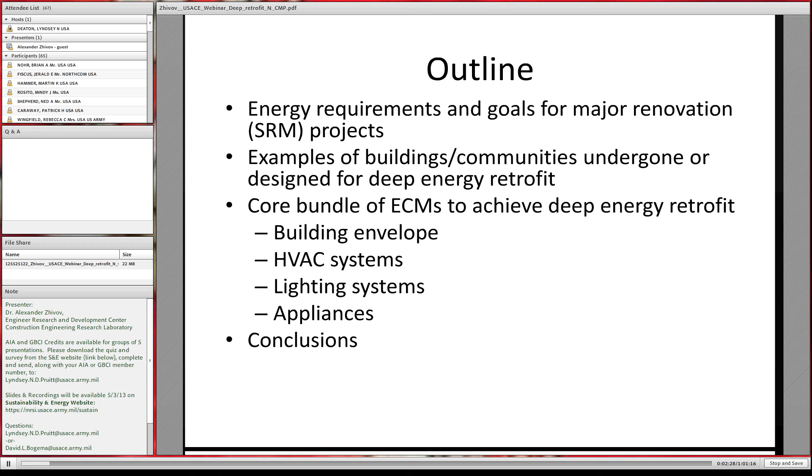So today I will cover the following topics. I will talk about the energy requirements and goals for major renovation SRM projects. I'll show you some examples of building communities undergone or designed for deep energy retrofit. We'll talk about the core bundle of energy conservation measures to achieve deep energy retrofit. We'll address building envelope, HVAC systems, lighting systems, appliances, and then I will come to conclusions.

So probably you already saw this slide a few times, so I just want to recap it. We have building site energy use reduction requirements, which are outlined in Energy Policy Act 2005. We have ECB 2010-14 for the site energy use reduction, which soon will be replaced by a different one, and I believe it will be referencing not ASHRAE Standard 90.1 2007, but a later version from 2010. We have a fossil fuel reduction requirement stated in EISA 2007. Army policy to achieve 8 net zero energy installations by 2020, 25 by 2030, and we also have an Army requirement to adopt ASHRAE Standard 189.1.

So now, just to deconfuse you with all these requirements, I'll just show you which ones are more or less stringent. So actually here in this table, you have energy use intensity targets in kBtu per square foot per year. And as you can see on the site energy, the most stringent is the Corps ECB 2010-14, which is 40% better than the ASHRAE Standard 90.1 2007.

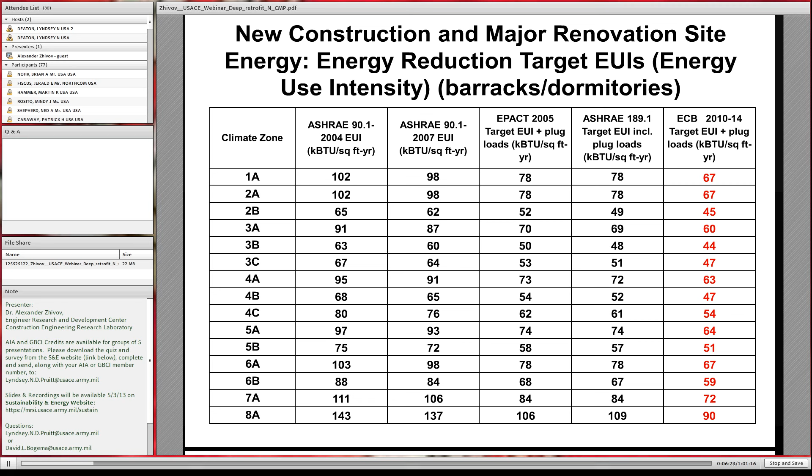Okay, so this one I think we'll go on, yeah. So I will go briefly over these last two slides.

So this slide shows you the EISA requirements based on the fossil fuels. So the table shows the CBECS numbers in kBTU per square foot a year, and then in order to get your target for 2010, you'll need to multiply it by 0.45, and starting at 2015, you'll need to multiply it by 0.35. So it will be only 35% left from this number.

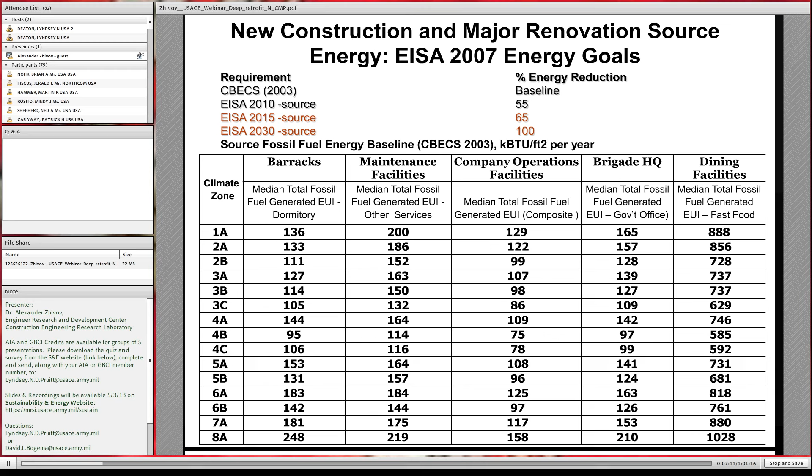So the next slide shows the table with proposed ASHRAE Standard 100 energy targets for existing buildings. This standard later this year will replace the existing energy efficiency standard for existing buildings that was issued in 2006, and it will cover about 53 types of buildings.

However, Army buildings are not covered well in this table, so we'll have to adopt some categories as we see fit. For example, Army dining facilities will have a better representation by fast food restaurants here. And barracks will be like dormitories, and let's say maintenance facilities will be like other services. But in any case, that will help us at least get an understanding of how to meet our goals with energy, if we decide to adopt ASHRAE Standard 100 for the Army.

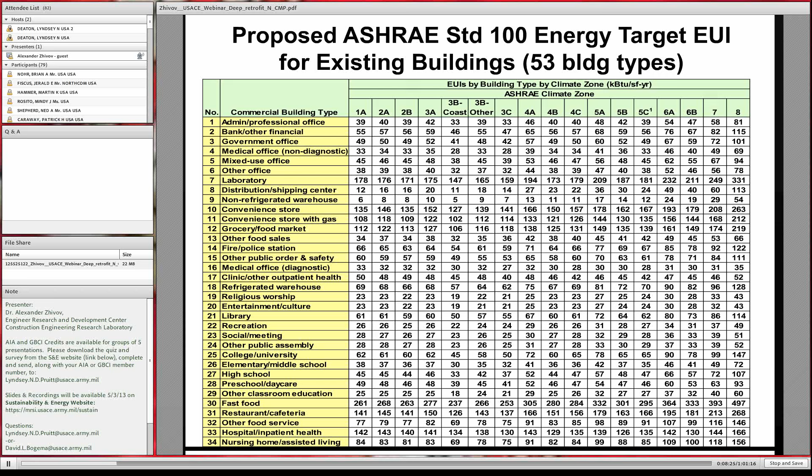This one is the most stringent requirement among all others. We started thinking that it will be easy to reduce the energy use by 3% a year. So during the first few years, we were lucky to get below the curve and to get more energy reduction than is required by law. And we're talking about section 431 of the EISA 2007 requirement. However, during the last few years, we are not meeting this requirement.

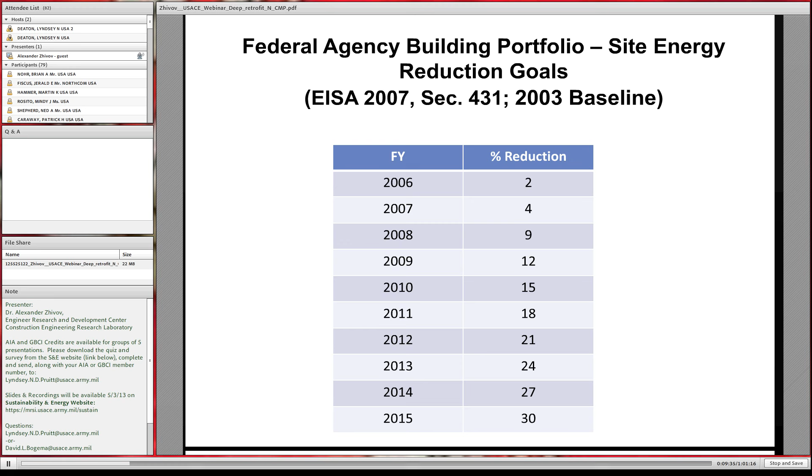And the reason is very simple. If you take our requirement for 2015, it means that we need to reduce our energy consumption in the whole Army portfolio by 30%. So we don't have money to touch 30% of buildings, but if we had, it means that every single building needs to be renovated to a net zero energy building, which is not feasible. So this is a very stringent requirement, and we need to find a way to deal with it.

So having said that, we need to state our definition of the deep energy retrofit so that we can spell out our requirements to our contractors with our new renovation projects. So EISA 2007 and net zero energy installation energy goals cannot be achieved when new and major renovation projects are designed and executed based on minimum requirements, even including ASHRAE Std 189. These goals have a chance to be met with all funded projects designed and executed to achieve deep energy use reduction.

So deep energy retrofit may have different definitions. In Europe, for example, the member states define it as nearly zero energy buildings, which for me doesn't make a lot of sense. It's not very specific. Some countries like Germany or Austria define it as a passive house level to which buildings need to be renovated.

So given some experience with deep energy retrofits both in the United States and abroad, my personal proposed definition for deep energy retrofit at Army is at least 50% site metered total energy use reduction, meeting proposed ASHRAE Std 100 EUIs, EISA 2007 requirements for 2015, and at least 40% better than ASHRAE Std 90.1 2007. So these are a combination of requirements that are not competing but adding to each other.

So let's look at what kind of examples we have from the US and from overseas. We have a great database developed by New Buildings Institute, and it was a project funded by the Northwest Energy Efficiency Alliance. It has more than 50 buildings that were retrofitted using the deep energy retrofit concept. As you can see, some buildings were 79% better against the baseline, others were 68 or 46.

So there are about 50 buildings in this database, and actually it's a great success story, and we'll be working with this organization to learn in more detail the way they got to these energy savings.

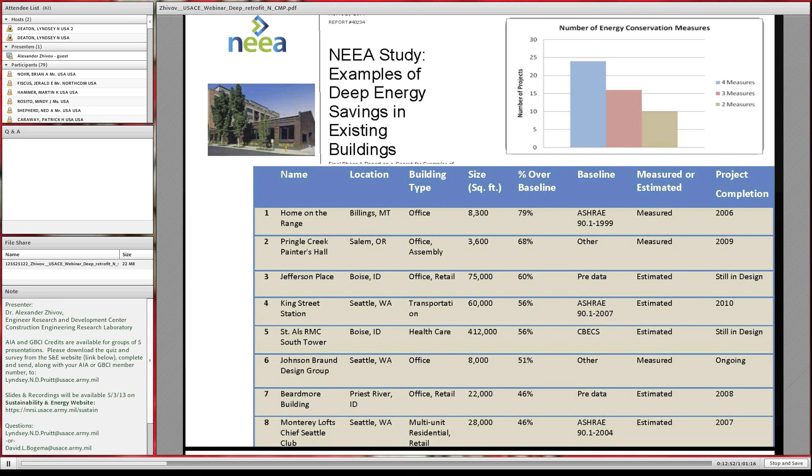Example from our Army renovation project. In about 2008, IMCOM wanted to renovate buildings at Fort Polk, not because of energy issues, but because of a mold problem that we had. So having no energy deep retrofit in mind, we worked together with the Fort Worth district, and by the end of the day, we had a building that was about 50% more energy efficient compared to the other similar buildings next to it, both on electrical and thermal energy use reduction, and it had an air tightness of 0.1 CFM per square foot at 75 Pascal.

It had great comfort, relative humidity below 50% all year long, increased living area and no mold problems so far. So the same concept was adopted to another 30+ barracks at Fort Polk, and the same design is currently used at Fort Hood.

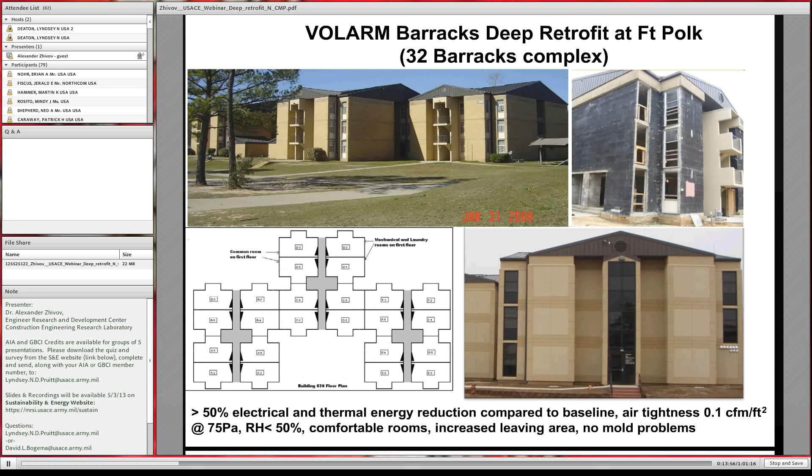Example from Germany. They looked at an area with about 200+ buildings for low-income families. So these buildings are pretty much similar to what we have with our barracks. And they were able to drop the energy consumption about tenfold compared to the baseline, not only with the site energy, but also with the source energy. The way they did it was from energy conservation measures like insulation, windows, air tightness, heat recovery, and such. Plus, they connected these buildings to a biomass-based central energy plant with cogeneration.

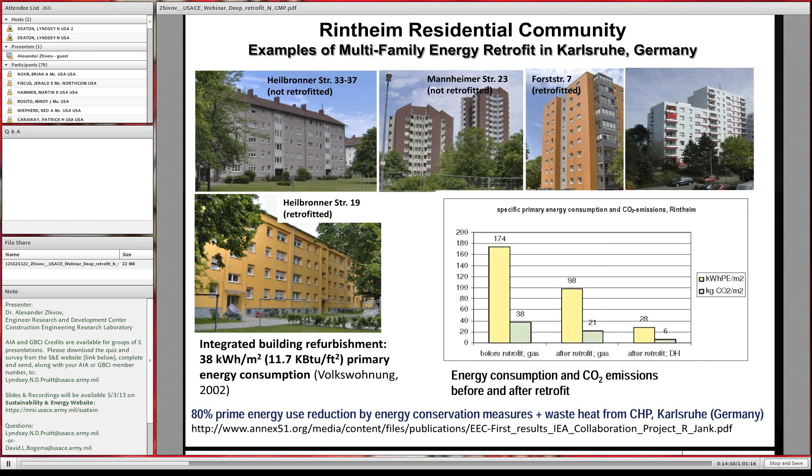Another example is the former U.S. Army garrison in Bad Aibling. It's an interesting story where they wanted to demonstrate what's available technology-wise in Germany. So a private company bought it from the government, and in a matter of 4 years, they moved from the baseline to plus energy. They are generating more energy than they are consuming.

And these are some pictures. Some buildings were demolished, some buildings were renovated, some buildings were built in the passive house style. They put a huge PV field. They used some solar water heating on the roofs and a biomass central energy plant.

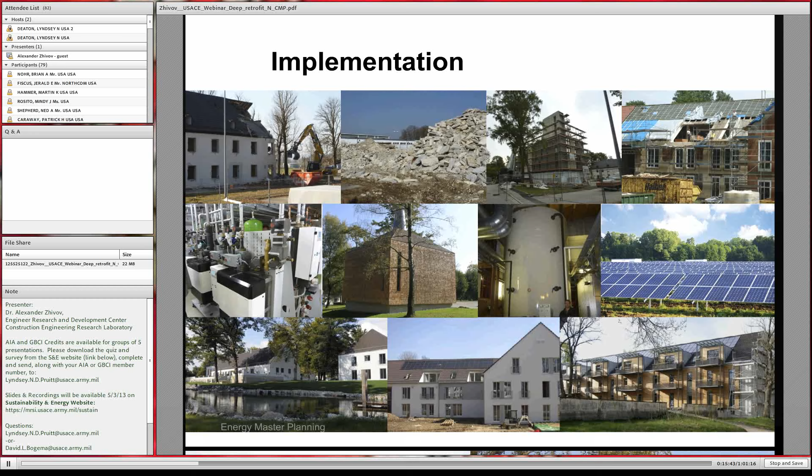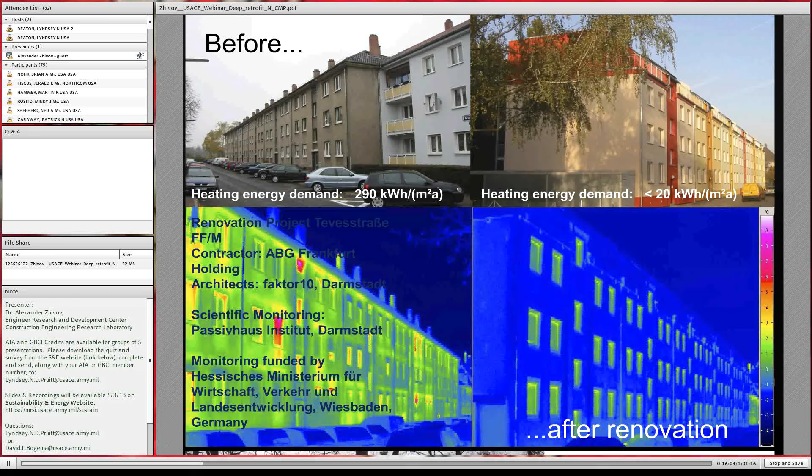Another example of deep renovation of a residential area in the Frankfurt area, where they were able to go from 290 kilowatt hours per square meter a year to less than 20. Again, this is a private sector project, and it is definitely cost effective. There are no subsidies in this project. Another army garrison in Germany, Paul Revere Village in Karlsruhe, where they did something similar with army barracks and other buildings to get a low energy community.

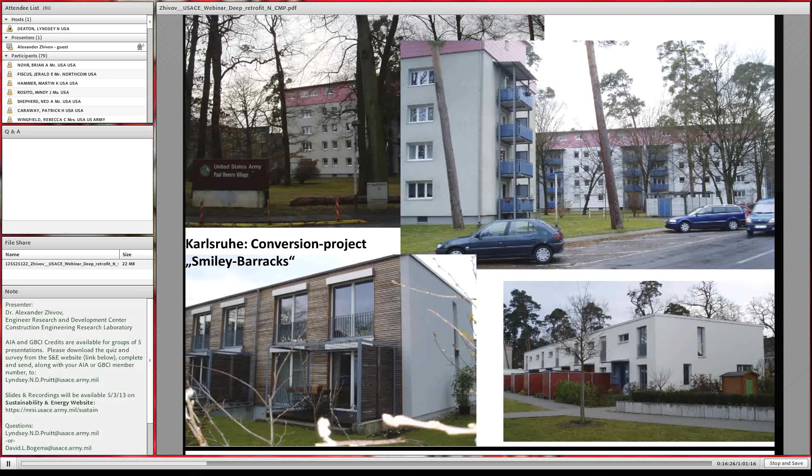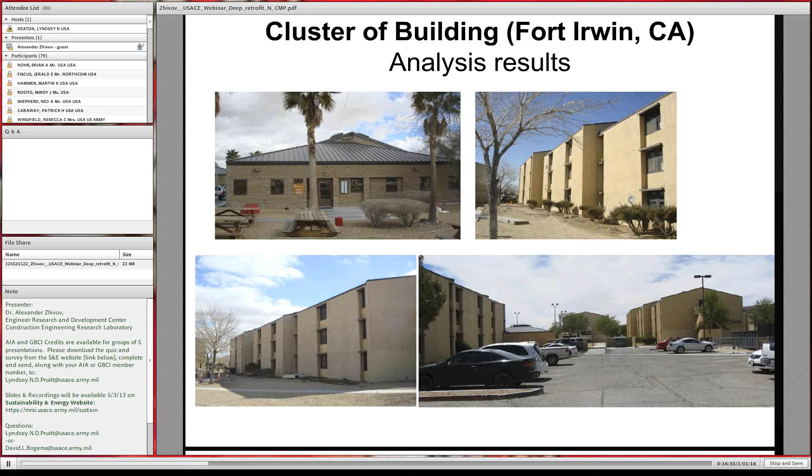We did a paper exercise for Fort Irwin, looking at a cluster of buildings with four barracks, one dining facility, and a central energy plant. We did something the same with all buildings: improved insulation, triple pane low-E windows, greater building air tightness, high efficiency lighting, advanced control system, Energy Star appliances, and we tried different types of HVAC system for each barrack. In all cases, we're using the dedicated outdoor air system, but with different ways of heating and cooling the building.

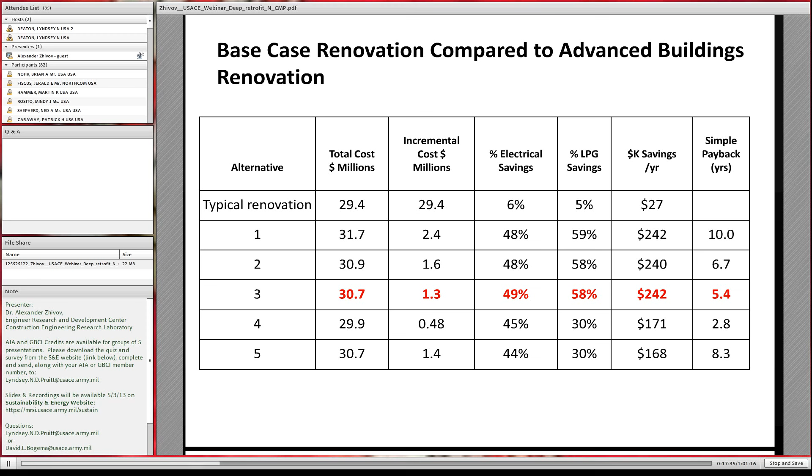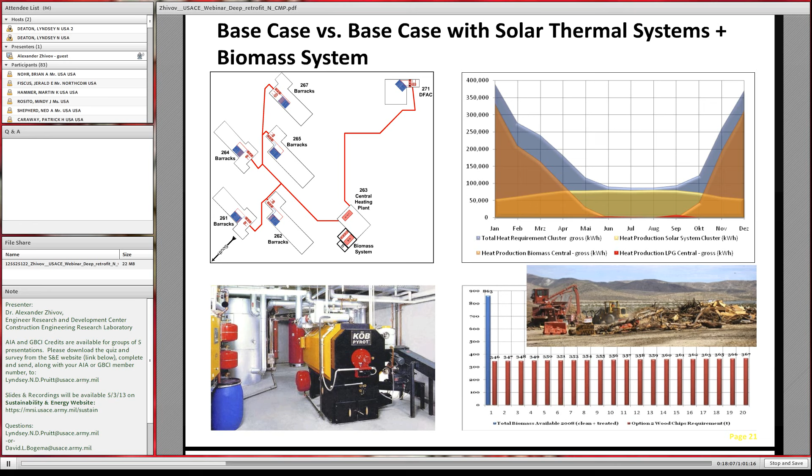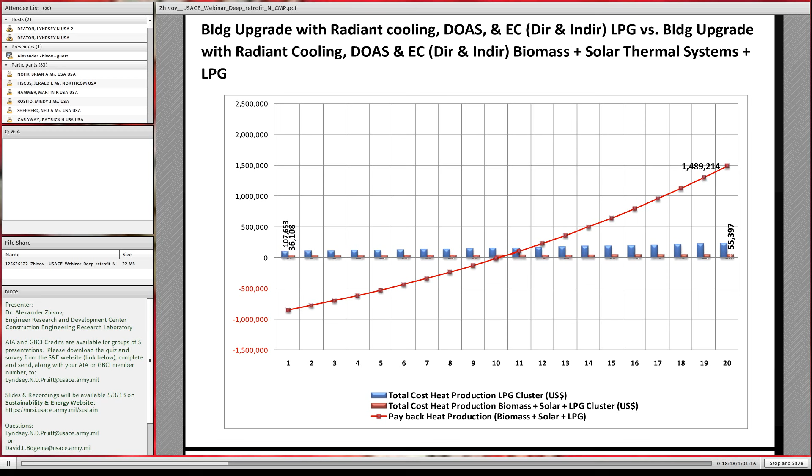Now, if you go further and you look at the central energy plant and replace LPG with biomass, and interestingly enough, we have enough biomass in the Mojave Desert. It used to be a Mojave forest. So instead of paying for removing this forest, they can use it as biomass for the boiler plant, in addition to the solar water heating. So with that concept, the overall energy saving will be net zero thermal and 50% electrical reduction, with a total payback of about 10 years.

Now let's look at what kind of books and materials are available to do something like that internationally. On the left-hand side, there is a great book that I picked up in France. It talks about different architects of buildings built in France between the middle of the 19th century up to the middle of last century, and the ways they renovate the building envelope with all the architectural details for each architect. It's about 300 pages. If you look at the graphics, you don't need to speak or read French. It's readily available on the internet.

On the right side, you see some materials from our project that we are working on with DESA on the installation design guides for net zero energy installations. We developed masonry retrofit guidelines for a couple of installations already, West Point and Fort Bliss, and we are working with the other installations to develop something similar for them.

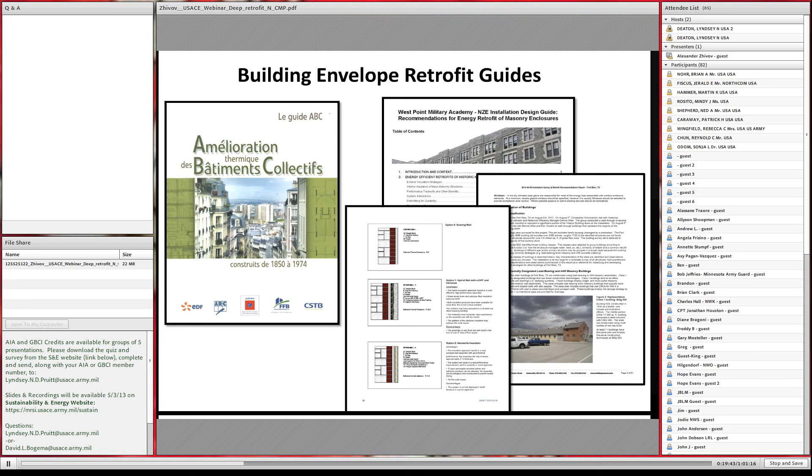A few other interesting handbooks and guides for building energy retrofits: the Handbook of Sustainable Refurbishment. It has interesting details on how you deal with both energy and sustainability in renovation projects, as well as a couple of guides which are already finished by PNNL, who worked on the project with the Building Technologies Office of DOE for K-12 schools and grocery stores.

Another good source of information will be the Passive House standard for retrofit. It has a book in English and German from the German Passive House Institute, and there is a different document for passive house renovation from Austria. It has interesting architectural details for both thermal barrier, air barrier, and such, and can be applied to different types of architectural buildings in the Army.

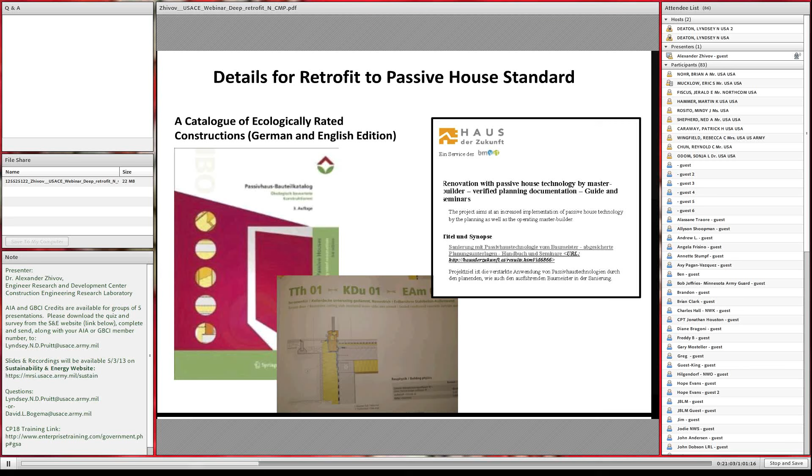So now let's go over energy conservation measures to be considered in deep retrofit. And I will start with the most important parts. It's improved building envelope insulation: walls, roof, attic, basement ceiling, better windows, a reduction of thermal bridges, and cool roofs where they're applicable. Also insulated doors, vestibules to the high traffic entrances.

Reduced air infiltration, efficient lighting, daylighting strategies, dedicated outdoor air systems for ventilation, pressure and humidity control, low exergy HVAC systems such as radiant heating and cooling, indirect air pre-cooling, ground coupled heat pumps and such. An important part is the reduced plug loads and using efficient appliances.

And it needs to be considered based on the energy cost and also whether you want to become net zero energy and pay for renewable energy sources, or you have low energy prices. So we'll talk a little bit about that later. Reduced energy waste through combined heat and power.

And so once deep energy reductions are achieved, renewable power sources become more affordable, for example, biomass or central solar water heating systems. So the key to cost effectiveness of the deep energy retrofit is using bundles of energy conservation measures. We are not talking about analyzing each energy conservation measure separately, because in this case you will never get to building envelope.

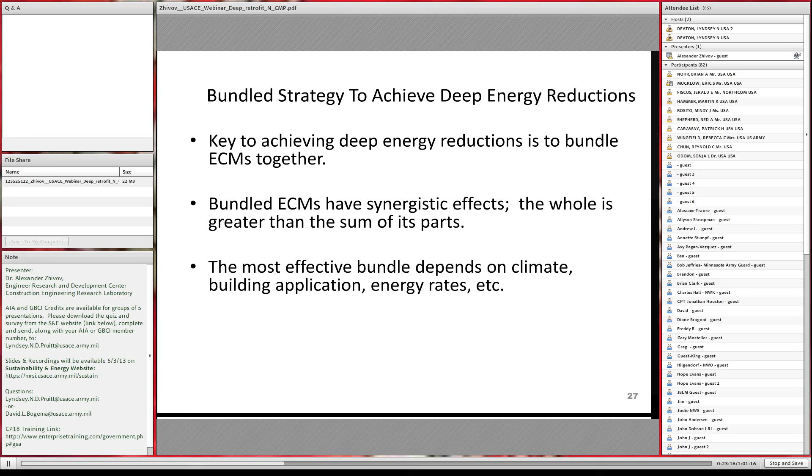Bundles have a synergetic effect, and in this case, if you're paying more for the building envelope, you can reduce or eliminate the need for some mechanical systems. For example, in some climates, let's say climate zone 5 and up, you don't need air conditioning. And of course, these effective bundles depend upon climate, building application, energy rates and such. So let's talk a little bit about each of these categories.

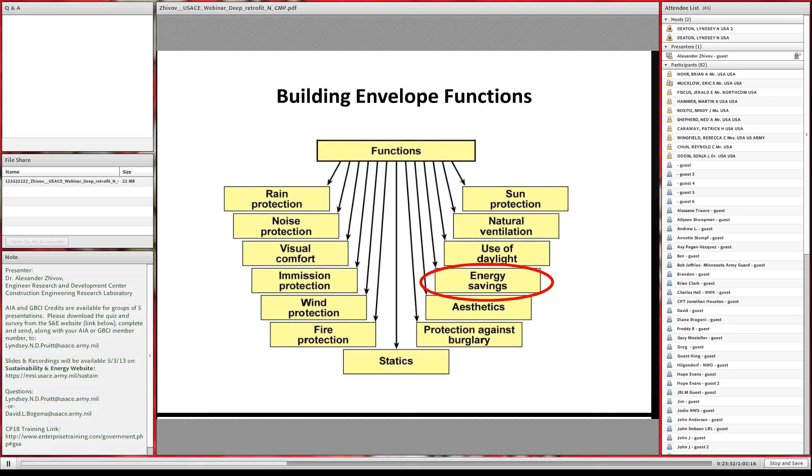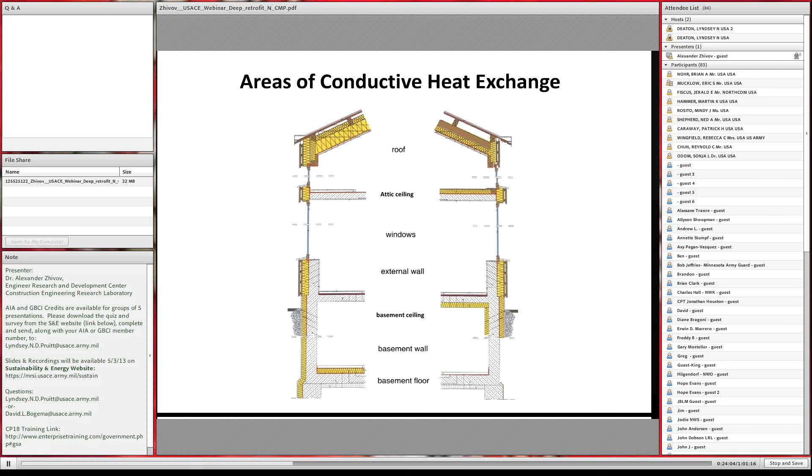This slide shows you building envelope functions, and one very important part is energy saving. So the heat exchange between the building and the outside occurs through conduction, radiation, and convection. And this is a schematic of the building envelope with the different approaches to its improvement. You can see different elements that you need to pay attention to, which include roof, attic, windows, external walls, basement ceiling, basement walls, basement floors. Something you can do with a renovation, something you can't do.

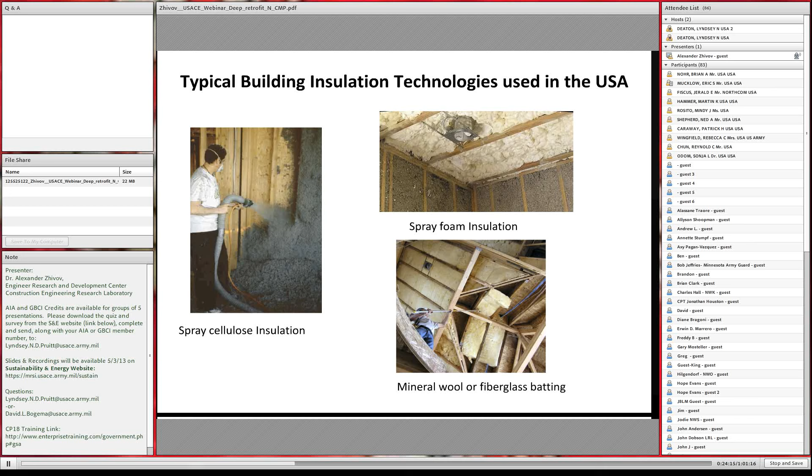So typical building insulation technologies used in the United States include spray cellulose insulation, spray foam insulation, and mineral wool or fiberglass batting. If you want to go to more advanced technologies which are also available in this country, you can look at technologies with a high R value. You can start with vacuum insulation panels. Since a few years ago, these panels are available in the United States. You can look at super insulating light transmitting systems, which are also available in the United States, and others down to mineral wool batting of R4.

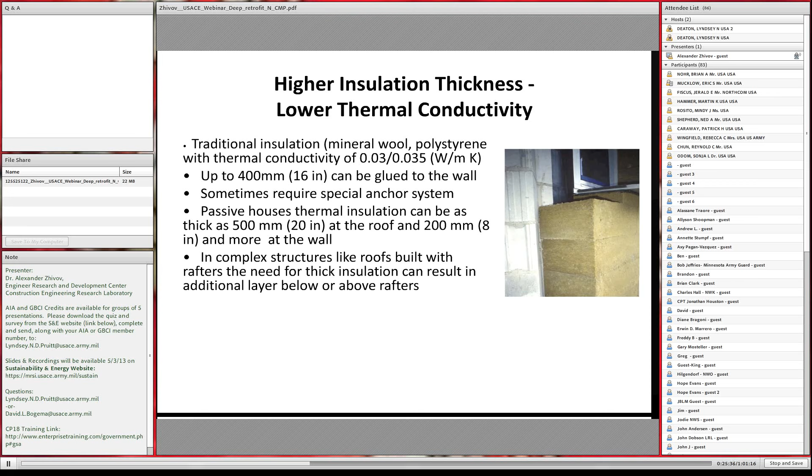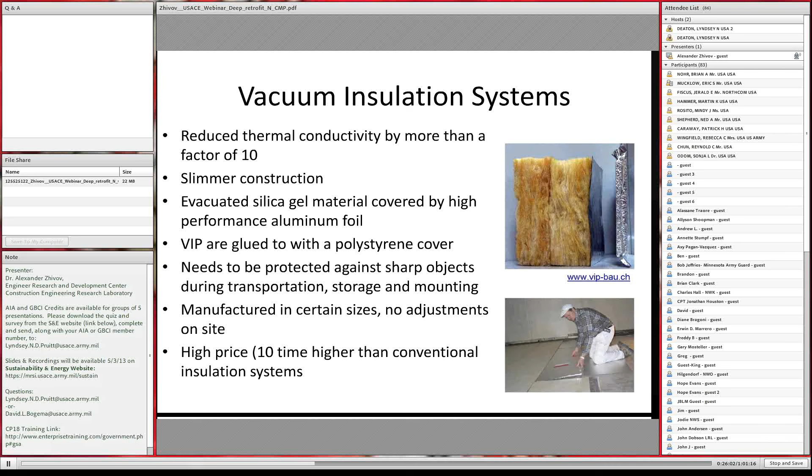Vacuum insulation systems are 10 times more expensive, but they are 10 times more efficient. So actually, if you are looking into the internal insulation of, let's say, historic buildings, you might want to consider vacuum insulation so that you can save space for the mission rather than put heavy insulation on the inside of the building.

In the guidelines that we are developing for net zero energy installations, you can find some components of the wall constructions for different classes of buildings, with a description of how you put these layers and how much insulation you need to put and where to put your thermal barrier, air barrier, and vapor barrier in the whole package.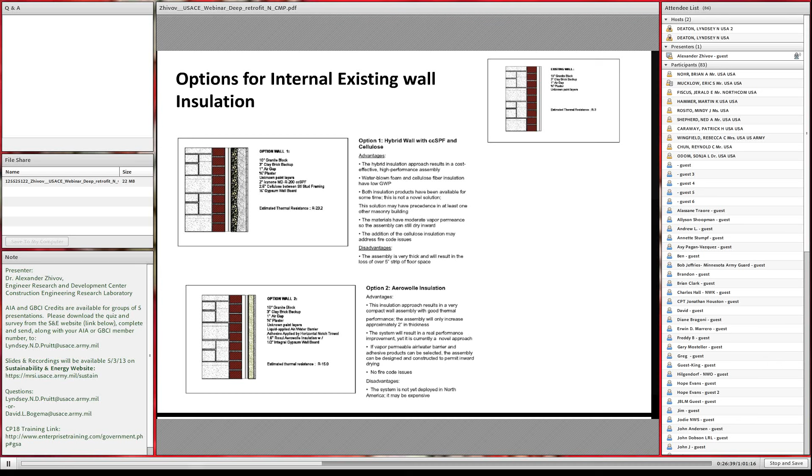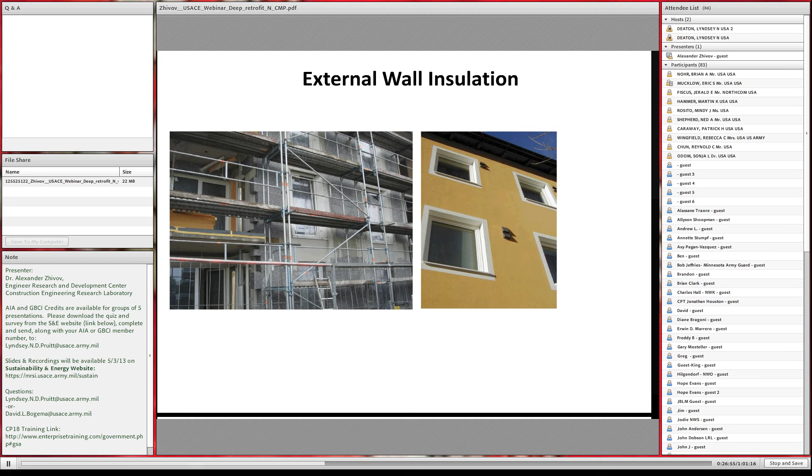This is an example of external wall insulation with an insulation level of R30, and here on the right you see how the wall looks after the renovation. You can see some technologies used for external wall insulation. You can use adhesives or fastening, and actually the problem with the fastening is that here in the United States we have only 6-inch fastening for insulation, while in Europe you can easily find 12, 16-inch fastening, and both here and in Europe, they are manufactured in China.

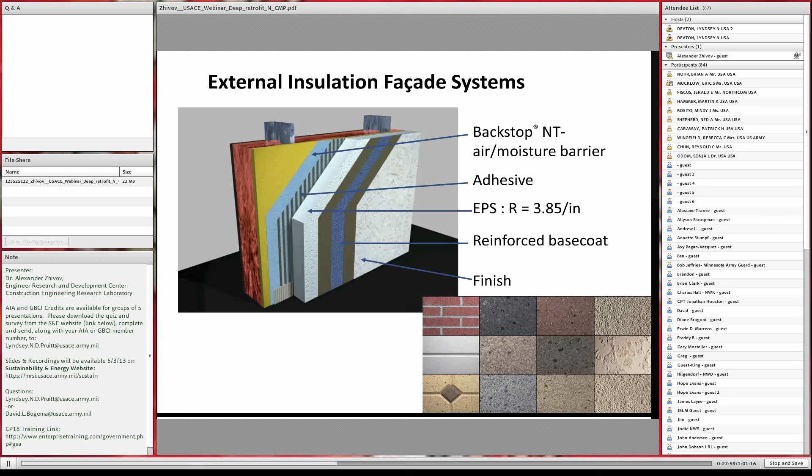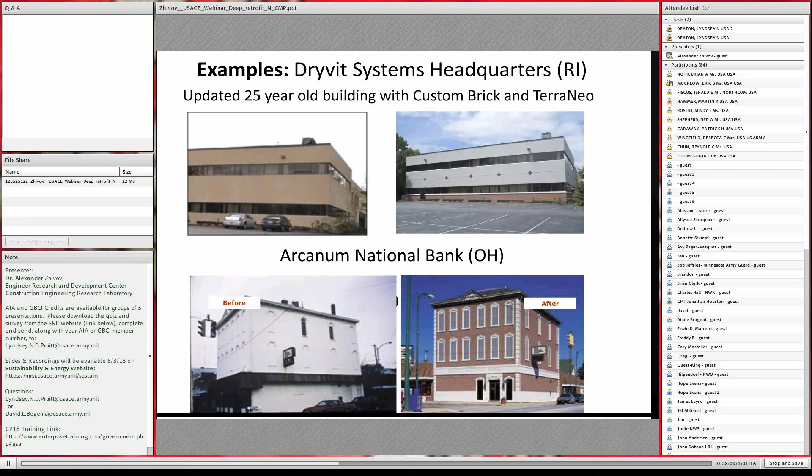Another type of external insulation would be the EIFS, and sometimes installations are not very interested in EIFS because they like brickwork, and in many cases a plain vanilla type of facade doesn't look attractive. Today you can find brick type of EIFS in many applications, and here are some examples of brick type of EIFS installed by a Dryvit company.

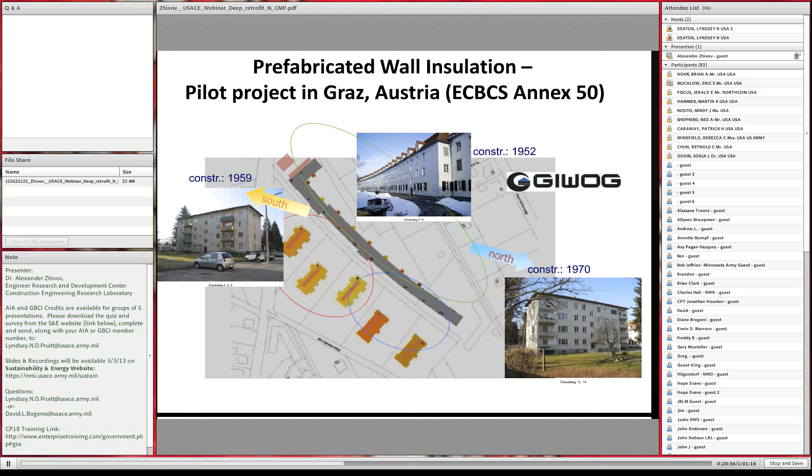There are some examples. One interesting and cost-effective way of insulation of existing buildings is prefabricated wall insulation. I just want to share with you a few slides from a European project which is a part of the International Energy Agency Annex 50 on prefabricated insulation for existing buildings. Here are some examples with residential buildings.

The concept consists of on-site installation and prefabricated modules that are done in plants like we have with manufactured homes. The quality of these products is much higher than when you have it installed on-site, and you can do a lot of things with that, incorporating your utilities in the insulation. You can put pipes and ducts and different communications within those prefabricated modules as well as windows.

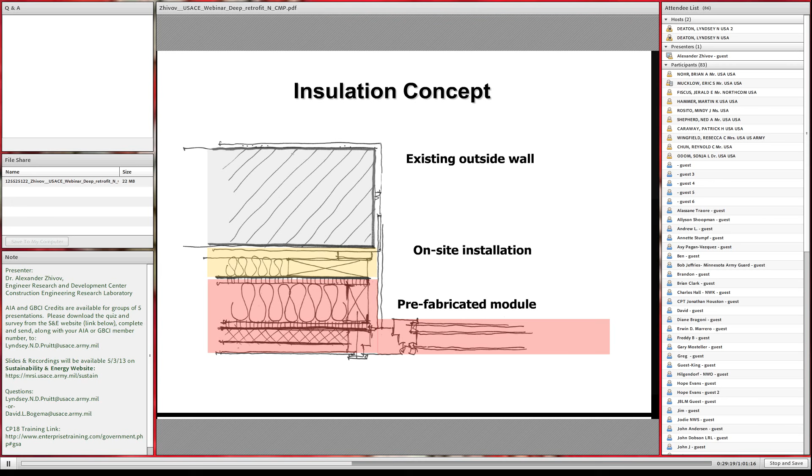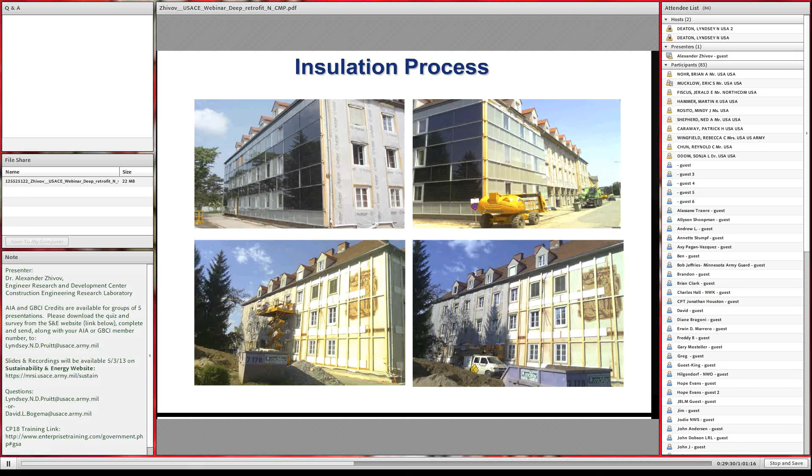So these are some examples of the installation process. We've seen the existing wall with some on-site frame that they're putting, getting the building ready for panels, and here come the panels. And the panels can have different types of insulation materials, but that's how they look and how they're installed.

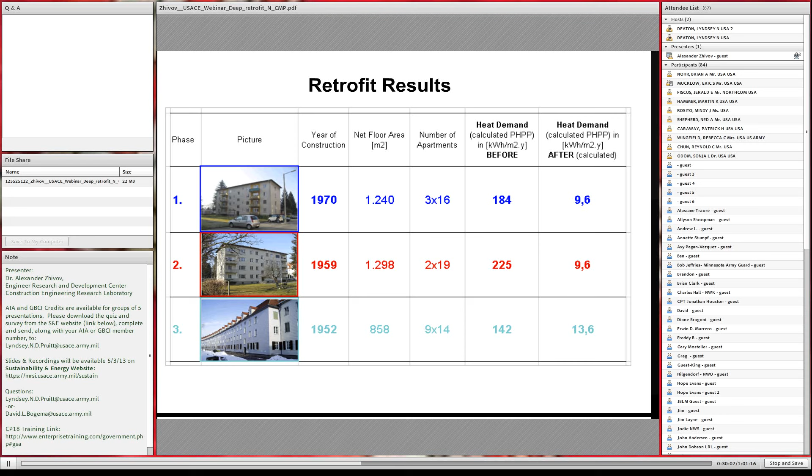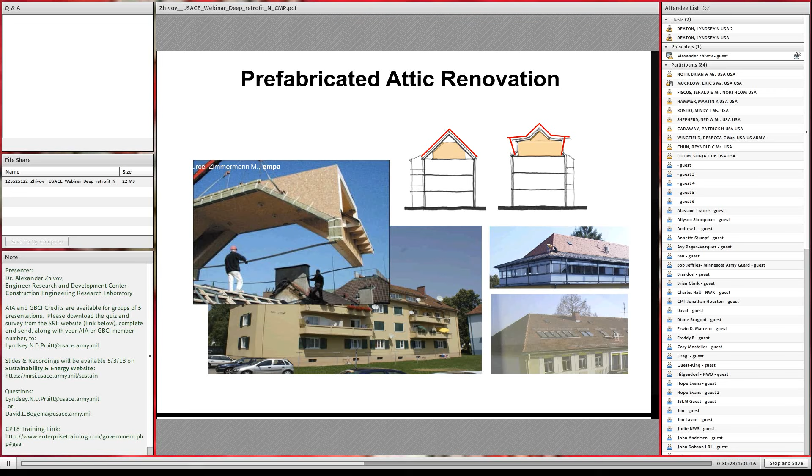And the overall effect is, again, energy conservation 10 times compared to the original baseline. And it has reduced cost because it's much cheaper to do it in the factory than on site. You can do it both with a facade and with the attic. So let me go back. So you can see an already prefabricated attic that is installed in a matter of hours on top of the building undergoing renovation.

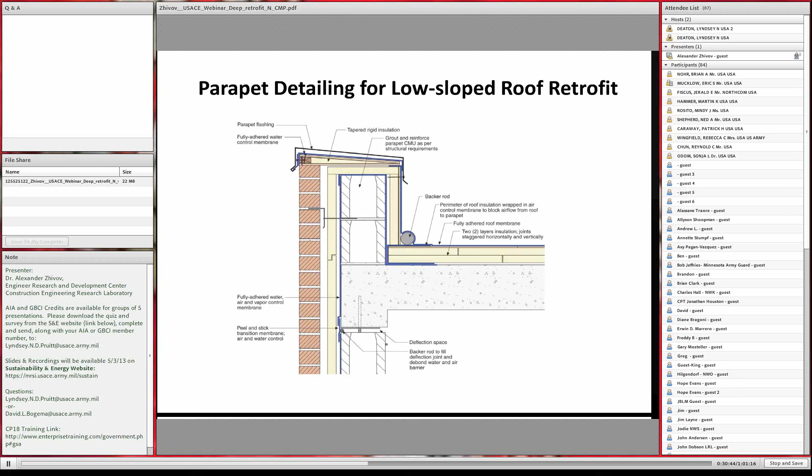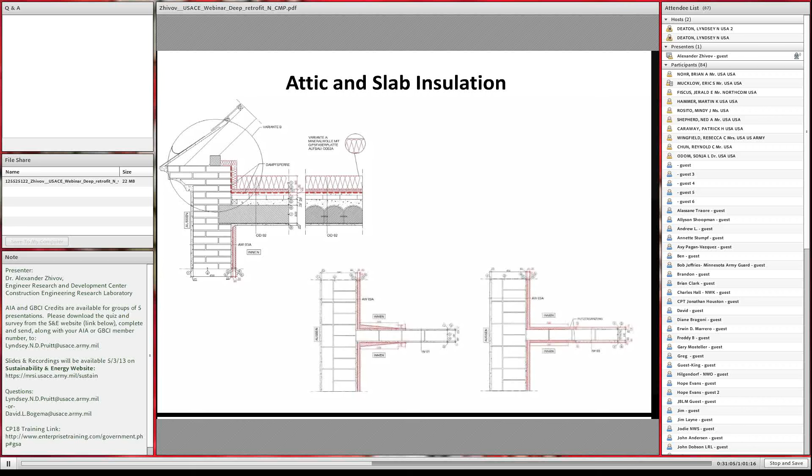Some details for a continuous thermal barrier for the wall to roof intersection. These are details again from the guide that we are producing together with Building Science Corporation. Some other ways to insulate attic and slabs. Actually, if you can't insulate the building from outside, the way to reduce thermal bridging with the slabs is to put about a couple of feet of insulation on the slab, preferably from both sides, if not at least on one side.

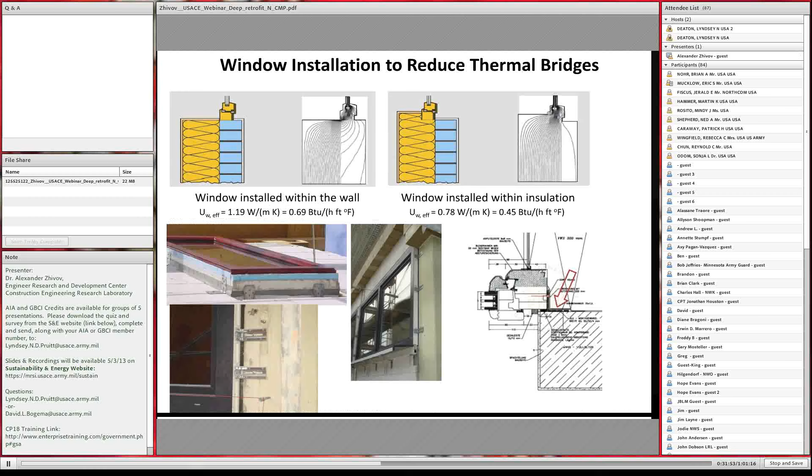Thermal bridges for the balconies and slabs. Again, you cut a thermal bridge and you attach the balcony to the building without penetrating through the insulation. Windows create significant thermal bridges. So when you install your windows, you want to install them not within the wall, but within the insulation layer, and you have certain metal profiles to attach the window to the wall, and then you put your insulation around the window. It allows you to reduce thermal bridging by at least 50%.

So I think that we don't need to spend a lot of time discussing air tightness. So we have ECB, the first one was issued in 2009, another one May the 1st last year. We went through different versions of the air tightness protocol. The last one was developed together with a team from the Air Barrier Association. The requirement is 0.25 CFM per square foot at 75 pascals. It's both for new construction and renovation projects.

It's important not only to have the requirement of the protocol, but to make sure that every single project has a test based on this protocol to see if the contractor is meeting this target.

Statistics from about 315 data points for new construction and renovation show that the average air tightness of the buildings is about 0.18 CFM per square foot at 75 pascals, and actually you spend less money and you have a better building if you pay attention from the beginning, rather than trying to fix it going from 0.4 to 0.3 to 0.25. And in this case, you typically have a building that will lose its air tightness in a matter of a month because they're trying to seal the drywall instead of doing it right. But we have this requirement.

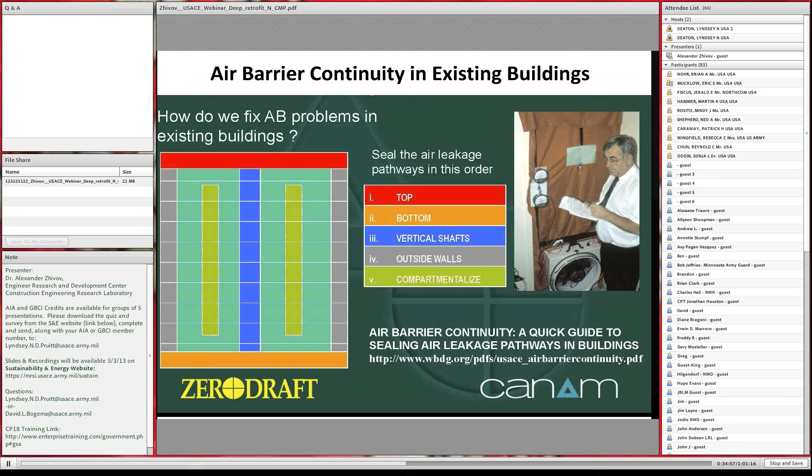There is a guide available on Whole Building Design Guide developed by our good friend who passed away, Tony Woods. He has a lot of good ideas on renovation of existing buildings, how to do that with architectural details and materials. It's available on Whole Building Design Guide under DoD, Corps of Engineers, and Energy documents.

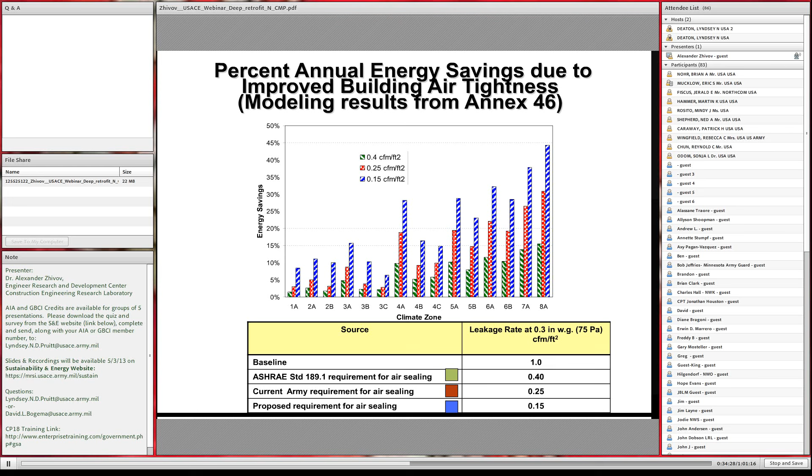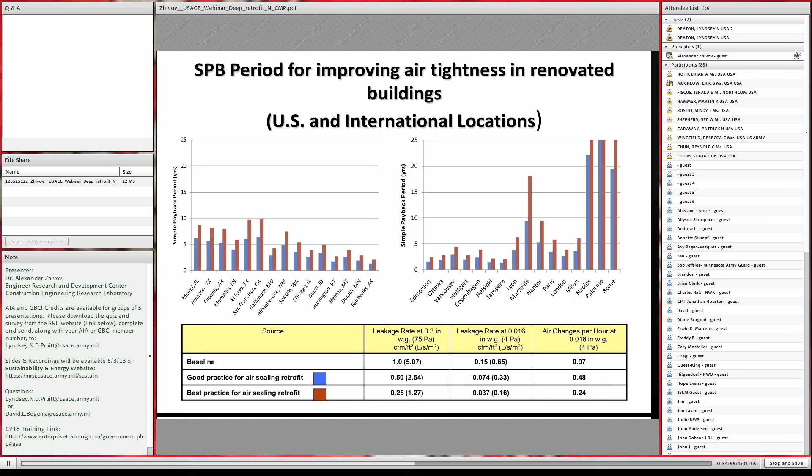Modeling results show that if you make a building more airtight, you can save up to 40% of energy, depending upon the climate, but it also will help us to deal with the mold issues. The payback, if you look at the data that we received from Tony Woods and things on the previous slide, is between 2 and 7 years, which is pretty good, and it also gives us a kind of a warranty for our mold issues.

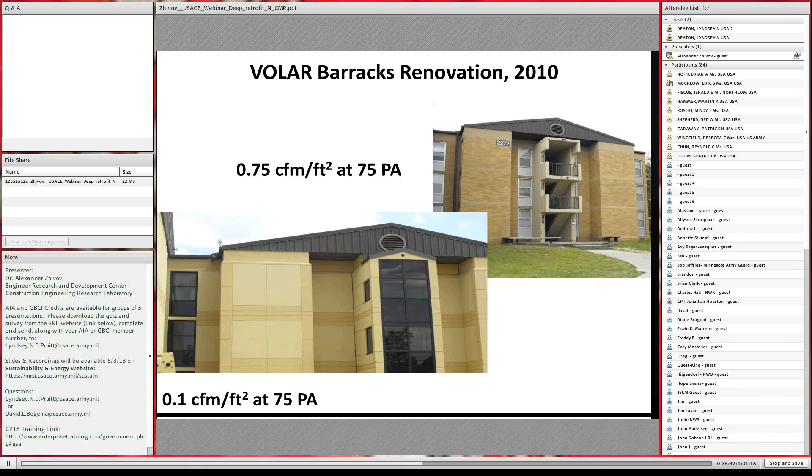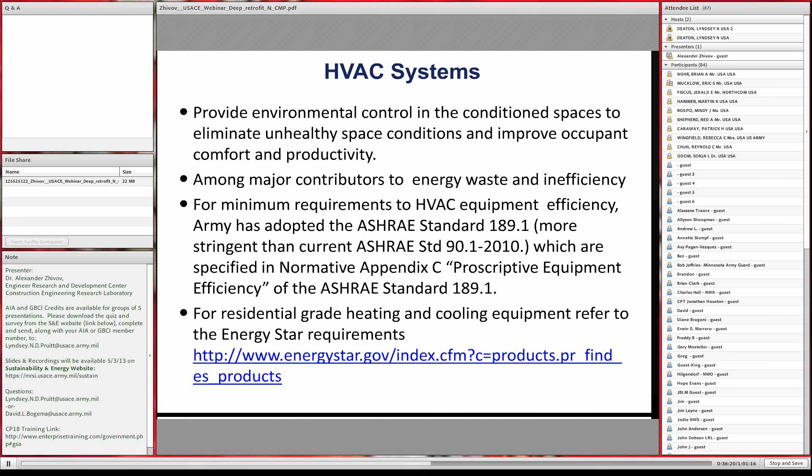So why do we need HVAC systems? Those are to provide environmental control in conditioned spaces, to eliminate unhealthy space conditions and improve occupant comfort and productivity. And they are among major contributors to energy waste and inefficiency. I would refer to ASHRAE Std 189, which is the most stringent for energy efficient requirements for HVAC systems. It's not an energy standard, but has the best requirements for HVAC. I would also refer to the residential grade heating and cooling equipment on the Energy Star website.

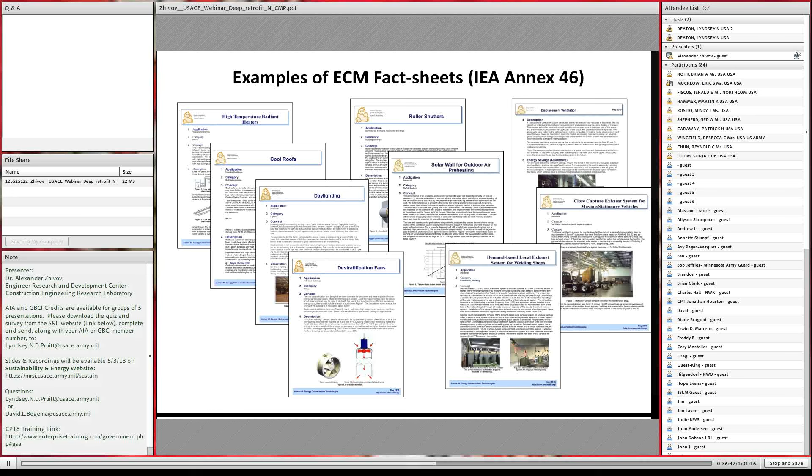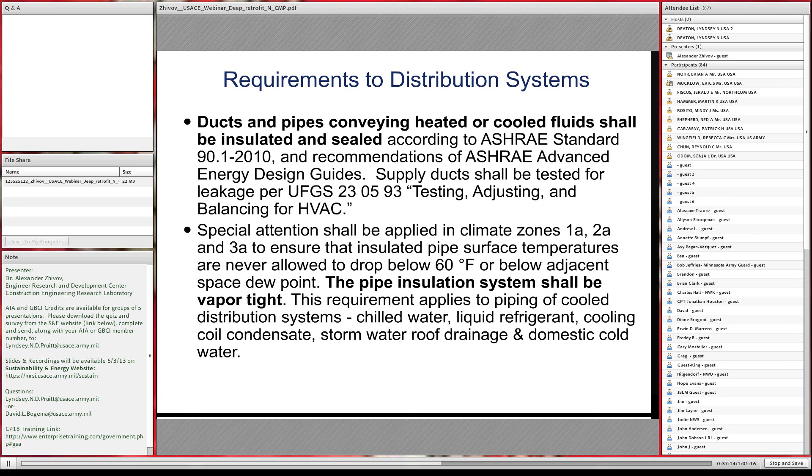There are a variety of different examples of energy conservation measures. Within Annex 46, we developed about 40 energy conservation measures fact sheets. We are currently finishing a book that has about 600 pages, and it talks about all these types of technologies and the economics and applicability for different types of buildings. So I would like to pay attention to a few things which are sometimes overlooked, which are duct and pipe insulation. It's not only energy, it's also mold prevention. And also the level of seal of the ducts contributes to significant energy use reduction.

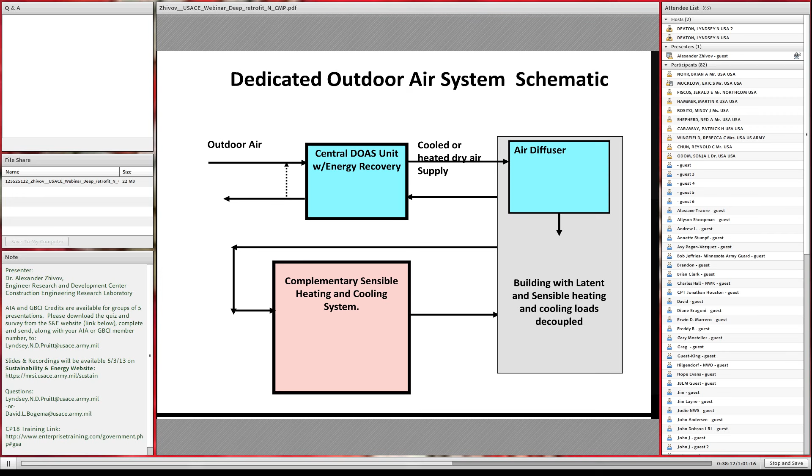Well, we can talk about different types of systems, mechanical, natural, and hybrid. Important here is to use as much as you can a dedicated outdoor air system, because you have a different demand for ventilation air and thermal load throughout the year, and it's more cost effective to do it in two different systems than one. You have smaller ducts, smaller filters and fans. You don't use as much space for ducts. So this system gives you flexibility and energy use reduction, if you use a separate system for ventilation, humidity control and building pressurization, and another complementing system provides heating and cooling.

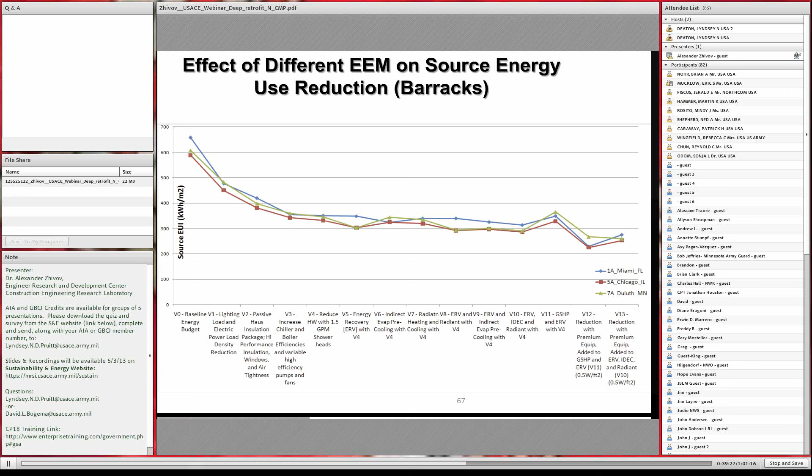So I just want to show you here the effect of different types of systems. The first 1, 2, 3, 4 points deal with requirements for energy use reduction from insulation and lighting systems, and package and airtightness. As you get into package 4, you already have a variety of different systems that can be used for heating and cooling. And as you can see, it doesn't matter what kind of system you are using, they are almost all identical in energy performance if you can significantly reduce the energy load on the building. The only difference will be in the third point to the right, where you're using ground coupled heat pumps. Those are more efficient on site energy, but require electricity for pumping, and therefore use more fossil fuel compared to other types of systems.

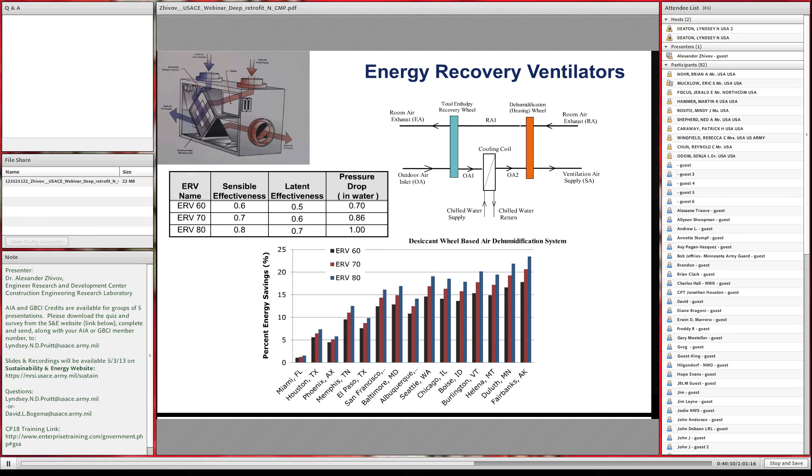So among important elements of the HVAC system, I would mention energy recovery ventilators. Those are must-use systems. They allow you to bring as much fresh air as you need at a minimum energy penalty, so they are transferring heat in the heating season and cold during the cooling season. Try to use the ones that have high efficiency. Today you can find heat recovery ventilators with efficiency up to 90%.

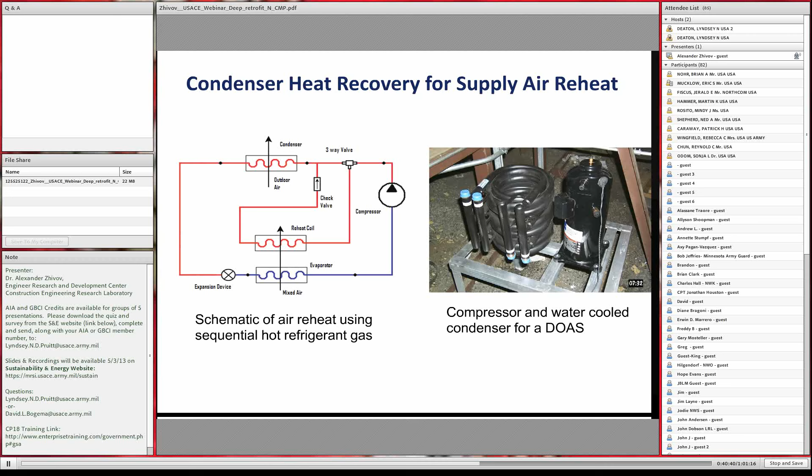Condenser heat recovery for supply air reheat. If you need to dehumidify supply air and you're using a DX system, you are wasting heat rejected by the condenser. So instead of that, you use condenser heat for reheat, so that you are not dumping cold air into the space and creating an environment for mold.

Another technology that you might want to consider is indirect evaporative cooling. It's not a swamp cooler, it's a more advanced system that was tested at a few installations in the Army, like Fort Carson, Fort Bliss, Fort Irwin, and some others. If you use it in a little bit different configuration, you can use it in every single climate in the world, because what you are doing is evaporative cooling of the return air, and the return air parameters are probably the same all over the world. It's about 70 to 75 degrees temperature and about 50% relative humidity. So with that, you can either cool or pre-cool the supply air without using any kind of electricity.

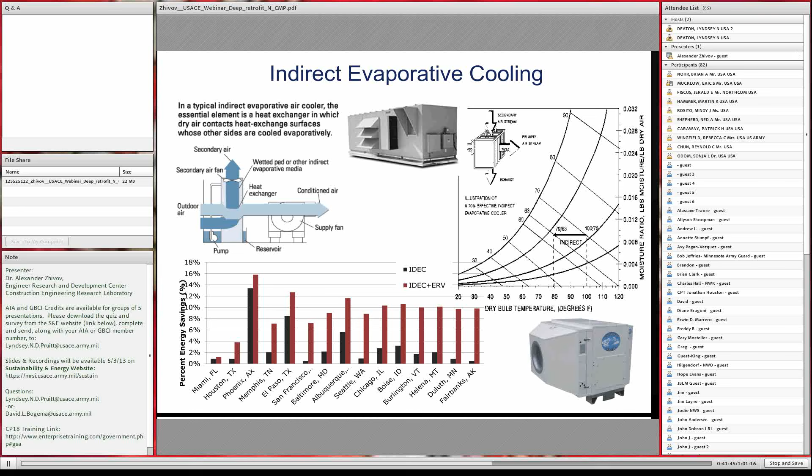What kind of system to use as a complementing system? You can use either radiant or air systems. Air systems typically supply cold air, and again, if you have problems with humidity, that results in mold. It also requires filter changes and fans to move the air.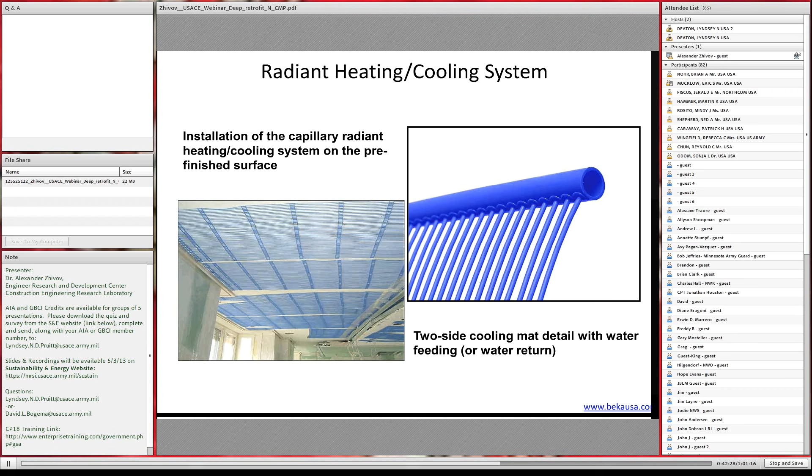Another technology will be the radiant heating and cooling systems, which you can install either directly under the plaster into the ceiling. You can put them over the floor, or you can make them a part of the panels. So these are some examples of the radiant cooling systems, how they look with the panels, how they apply, you apply the plaster to cover

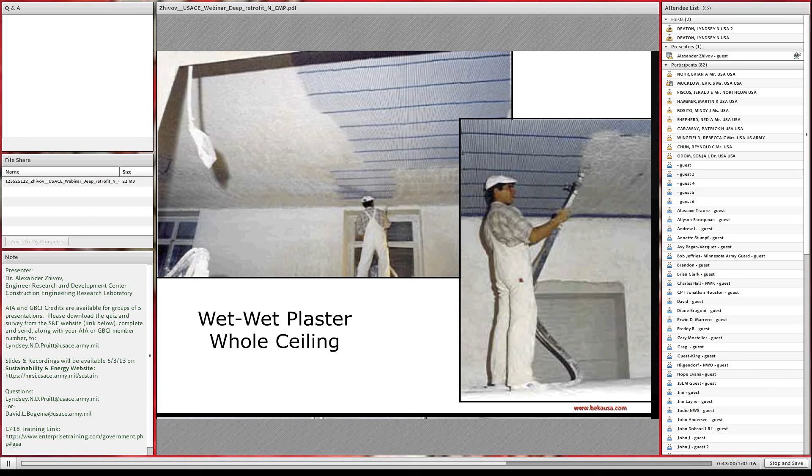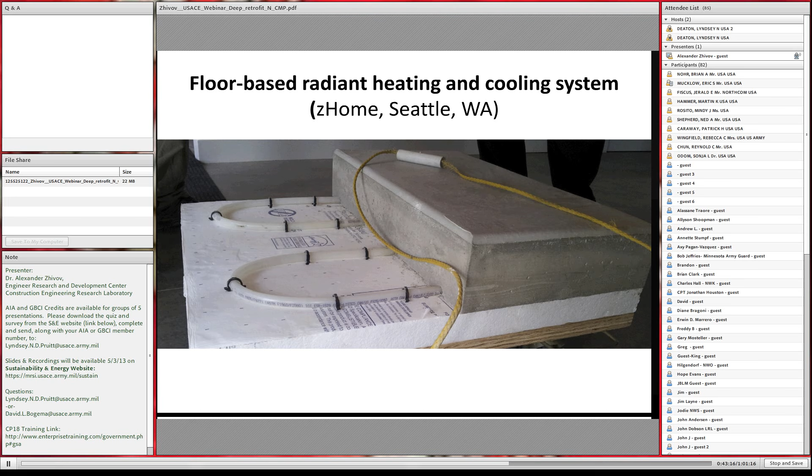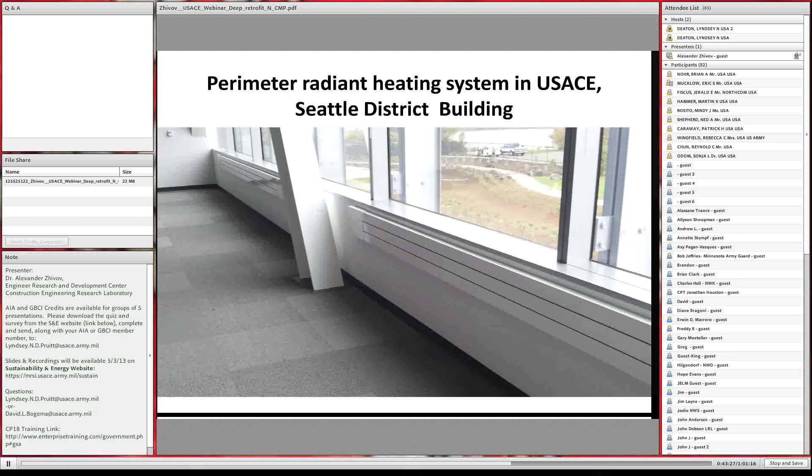radiant systems. We're working now on the demonstration project at Fort Detrick to show how it will work in the US environment, and there are multiple examples, including Chicago and Atlanta, where the system is already installed, and it's the first prototype. So how you install them in panels in the false ceiling, central system. This example of the radiant heating and cooling system in Seattle. Those are net zero energy buildings built in Seattle. Radiant perimeter system at the Corps district in Seattle.

So the next topic I would like to talk a little bit about is the lighting system. Advanced lighting is not only luminaires, it's also good design. And here you want to look at the design strategies. You need to try to meet your lighting requirements, not only LPDs or power density. You might want to look at the hybrid systems, which will be a combination of daylighting and electrical lighting. You want to look at the combination of ambient lighting and task lighting.

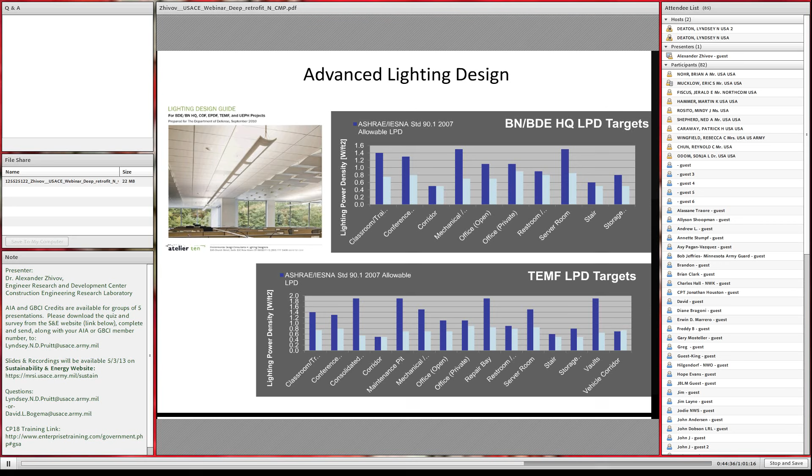And with the help of controls, you can reach much higher efficiencies than are currently required by ASHRAE Standard 90.1 or 189. So these are some examples of using this advanced lighting design compared to ASHRAE Standard 90.1-2007. And again, we have developed a guide for lighting design both for new construction and renovation for 5 buildings. Let me go to that list. This is the list of buildings that we already have this type of guidelines for, with the design strategy and type of luminaires and controls.

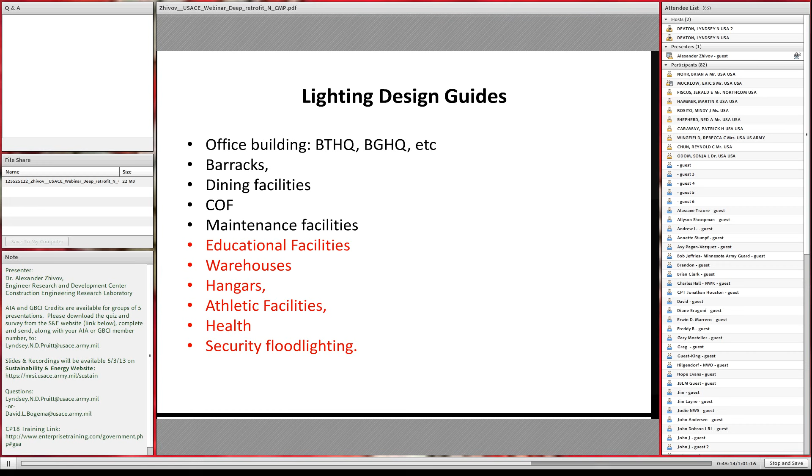We are currently working on another set of buildings which will include educational facilities, warehouses, hangars, athletic facilities, health, and also security lighting for net zero energy installations, but the same guidelines will be available and applicable to all other projects.

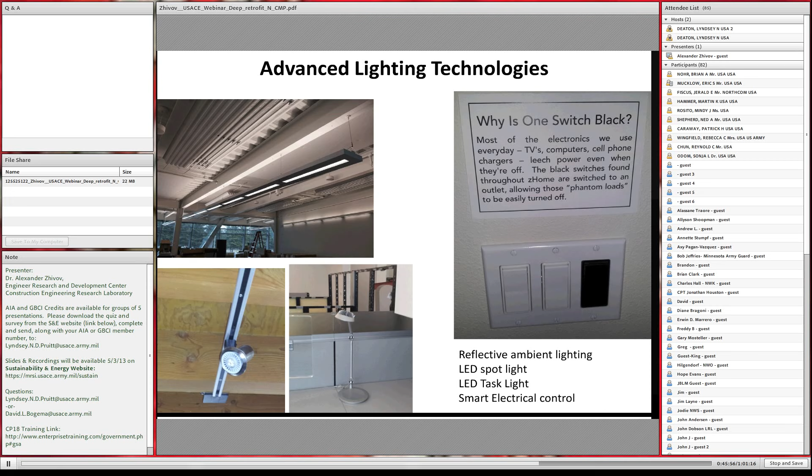So this is an example of advanced lighting technologies. You have LED spot lighting. I believe the picture was taken in Seattle, and the task light is definitely taken at the new Corps building in Seattle. And also you may find it interesting to have different switches for receptacles for plug loads, so you can turn them off when you leave, so that you don't have the charger pulling a few watts an hour for unplugged equipment.

Another important measure to reach your fossil fuel requirements is advanced appliances. So as soon as you are done with your building envelope and lighting systems, the most important part is your plug loads. And they're especially important because you need to multiply the energy used by 3.34 to get to the source energy, because the generation is very inefficient. You have no control in most cases over how power is generated, but you can reduce the need for this power,

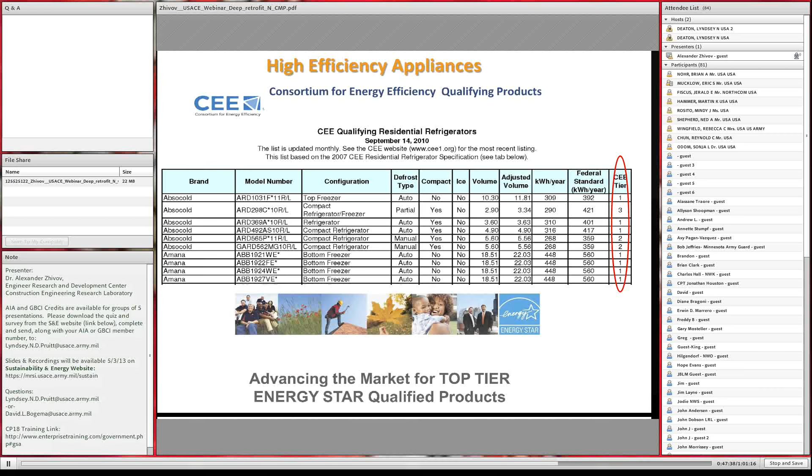and therefore you might want to look at some advanced appliances. The DOE database shows that, based on 2011 data, only 7% of government purchases use Energy Star appliances. So you might want to look at the top tier list of appliances developed by EPA. There is another tier 1, 2, 3 from CEE. There are other groups, and we are currently working on the recommended list of appliances for the Army in collaboration with the different agencies for net zero energy installations, where you also need to look at comparison with the cost of renewable energy.

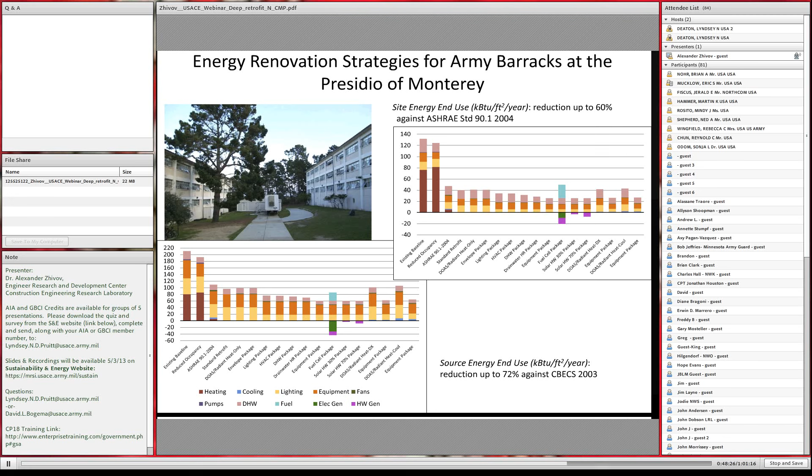Some examples of the future work. We are currently working on 3 different retrofit projects with the task force, looking at the deep renovation project at West Point. Here we have a potential for 60+% site energy reduction with the barracks renovation. At Presidio of Monterey, we have a potential with that project of about 72% energy reduction on source energy and 60% on site energy, again using the same list of technologies that we were talking about a few minutes ago. We are working with Fort Carson on 6 similar buildings.

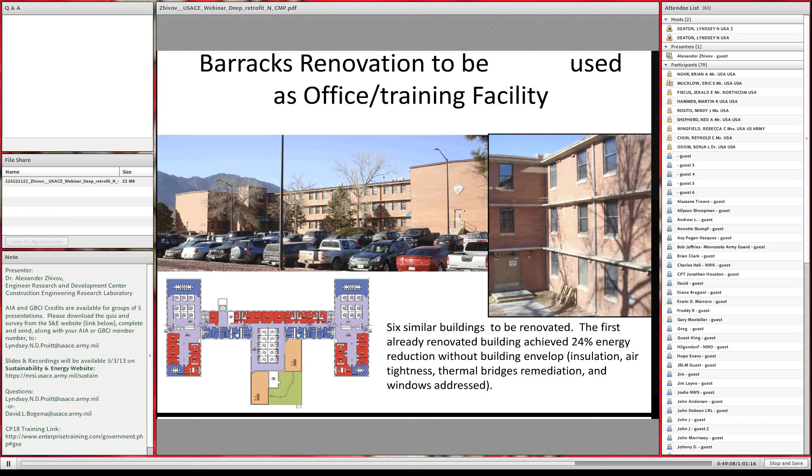Recently they renovated one of those, and they reached 24% energy reduction even without touching the building envelope. They looked primarily at HVAC systems and lighting systems. So can you imagine how much we can save if we cut those thermal bridges, which you can see on the right, and insulate the building and put in better windows? So we hope that we'll be able to achieve more than 50% energy reduction on this project.

So now let's get to conclusions. The level of technically and economically achievable energy use reduction with a major building retrofit depends on the following. Type of the building and its mission: it's much easier to achieve significant energy use reduction in barracks than in dining facilities or data centers. The climate zone the building is located in, San Francisco versus Fairbanks.

Initial energy use by the building, the codes it has been built to, or the level of degradation since it was built or last renovated. An important part is perseverance of the client to achieve energy goals. You need teamwork to get there. Clarity of statement of these goals and minimum requirements in the RFP. You really need to replace the statement that you need to renovate to this legal requirement or that legal requirement. You need to put energy use intensity for site and source.

You need to put certain requirements on types of windows and insulation and many other things, and be a little bit more prescriptive, especially with the energy use intensity. You need to have technical expertise in the project team. Your contractor needs to have some experience with deep energy retrofit. You need to do economic evaluation of bundled ECMs versus single ECMs, and not single them out, because some of them have a long payback, like insulation, or they have no payback. You need to bundle them and see what will happen then.

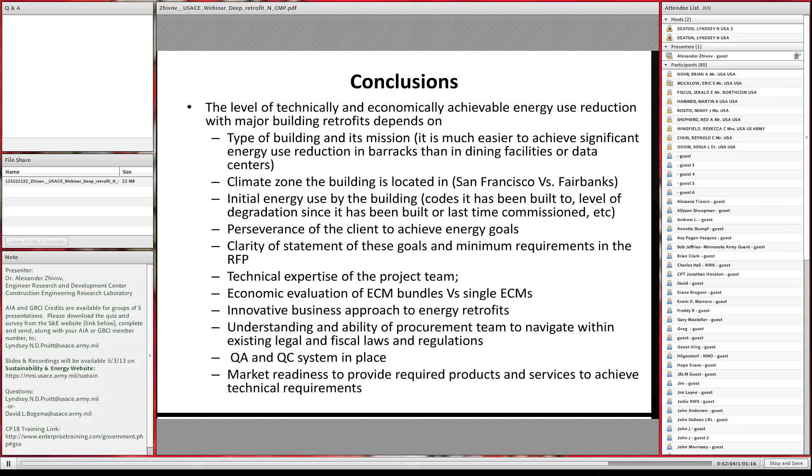And one other important part is the market readiness to provide required products and services to achieve technical requirements. Every second year we have the Solar Decathlon in DC, and all 20 teams, for the few years that I attended this event, were using German windows with R 10 to 12, while we are struggling to get R5 in our projects.

So a little bit about further development with deep energy retrofit. I already mentioned the DASA/FEMP task force to demonstrate deep energy retrofit with 50% energy use reduction at 3 Army installations. We're currently working on International Energy Agency ECBCS program Annex 61, development and demonstration of financial and technical concepts for deep energy retrofit of government public buildings and building clusters. We have a number of countries involved, and we were lucky to get a lot of contributors from the US. Our next meeting will be in DC this Thursday and Friday, where we'll see how we can bring all these resources together. The German Energy Agency group is in charge of this project.

It will cover technology bundles for a few typical building categories with specific recommendations on insulation values, windows, and such. We'll do some modeling, and we'll develop some guidelines that will help to streamline the process. Actually, for some of these guidelines, we need some of your help. If we have somebody from the centers of standardization dealing with the list of buildings we were talking about, we need some joint work so we can develop these guidelines for specific standard types of facilities in those categories of buildings.

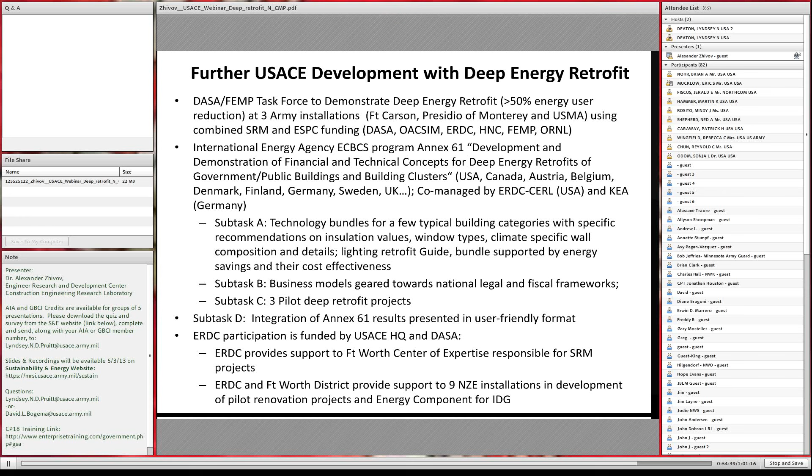So we want to thank the Corps of Engineers and DASA for support of our work dealing with deep energy retrofit, because without their buy-in and support, we wouldn't be able to get even to this webinar.